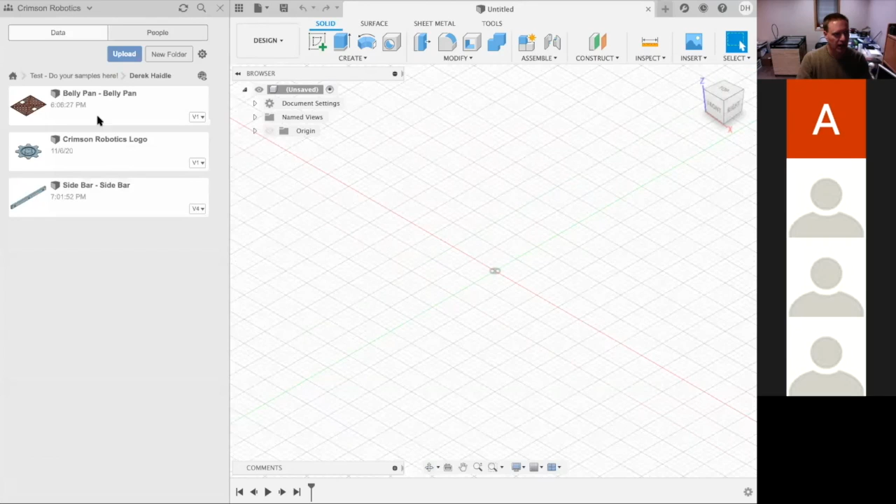And again, in my test folder, I have my belly pan. Let's open her up. This is going to be a lot of the same stuff again. All right. So we've got to go around. We've got to figure out how to do everything here. So we're going to short circuit some of this stuff because it would take a long time to actually do this and set it all up, but we're going to do quite a bit of it.

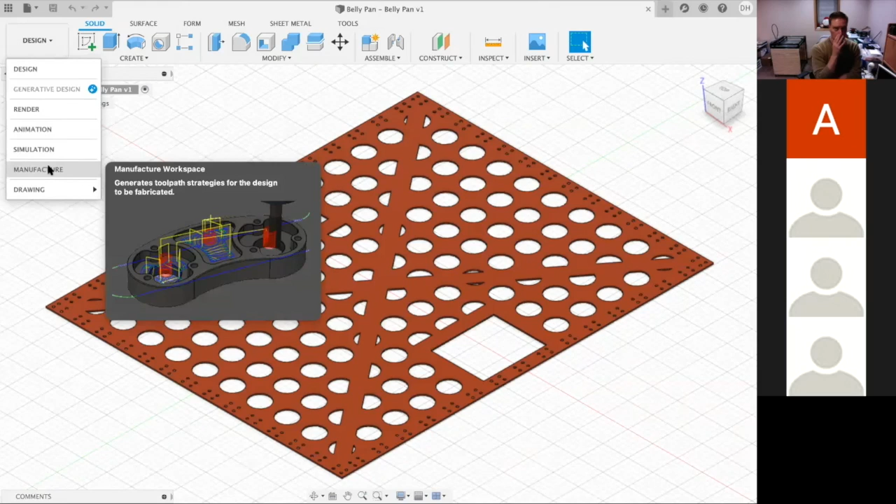So design wise, we're going to go into manufacturing again. Make sure you select manufacturing. We go into our setups, new setup. Now, this time what we're going to be doing is taking a flat piece of sheet metal, right? Like a big piece of sheet metal here, and we're going to be mounting it down on our Velox CNC and going around it. Okay, so just have that image in your mind as we're doing this. We are probably going to also mill out the exact dimensions of this within that piece. So let me show you how we're going to do this.

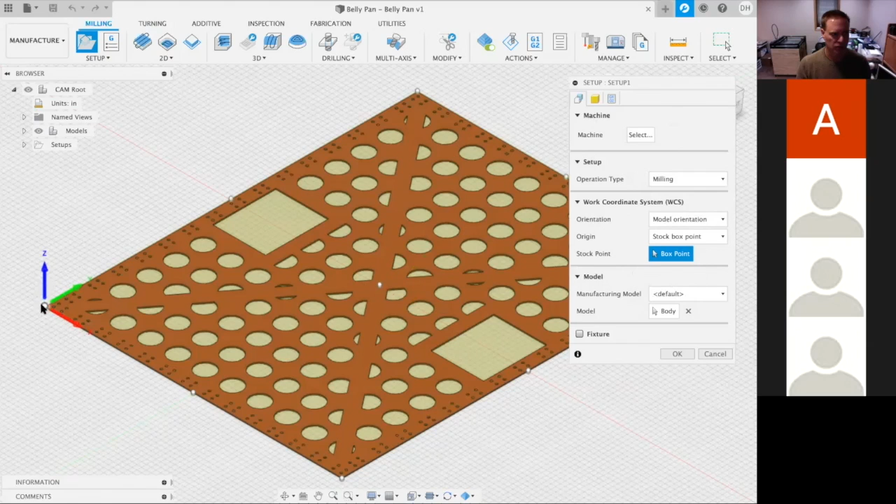Don't worry about machine setup, milling. Orientation, we're going to keep this orientation of X, Y, and Z, but we're going to move our box point to this bottom left-hand corner, okay? So again, we're going to start milling from down in this area, right? The body we already have selected. We're going to go over here to our offsets. This is where I'm going to add, I'm just going to do this kind of indiscriminately at 1 inch, and the top offset I'm going to leave at 0, okay?

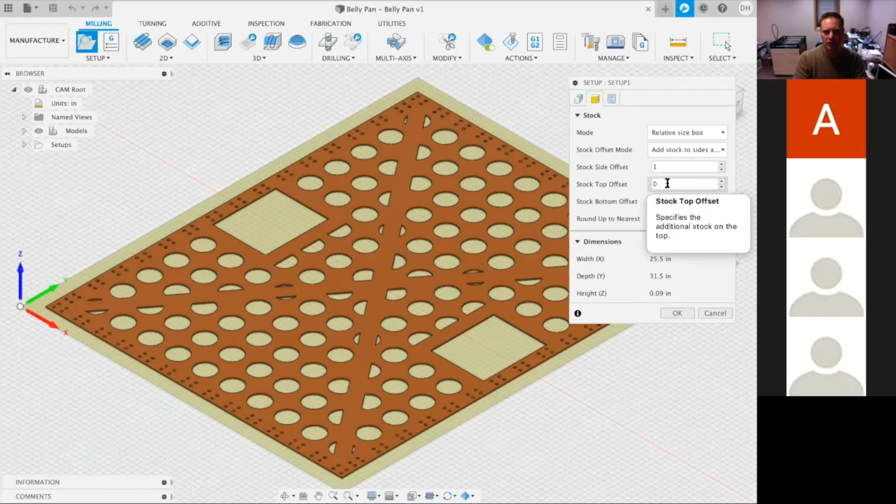So what this means is when we were choosing the thickness of this in Onshape, I believe it is 0.09 inches that we selected. So 0.09 inches thickness for our aluminum, we would want to make sure we had a piece of aluminum that was that thickness, and then we would leave our top offset as 0, right? So when we're doing sheet metal, we want to CAD the same thickness as what we actually have in real life, right? So we would go over and find a piece of sheet metal, figure out that depth, and then notice our Z height here is 0.09. So that's exactly what we have, all right? And we go from there.

All right, so what this means is we have a piece of sheet metal that's actually bigger than our belly pan. So somehow we've got to actually get this milled out of that piece of sheet metal. So we're not going to be perfectly in the center. So when we start our X, Y, and Z, it's going to be at the edge of the sheet metal down here, but our actual belly pan is going to be interior to it. Okay, perfect. All right, so we put our sheet metal down, we find our edges, and now we need to pick one of the operations to do.

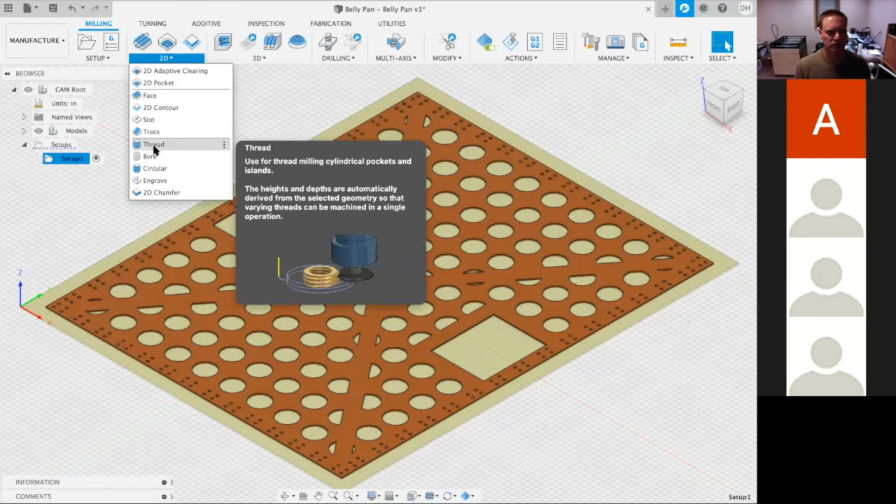You can start with any of the holes. Usually, again, I tend to pick the smallest hole first and put in my smallest bit first and go around and do all those holes, all right? There's other ways of doing it too. For example, maybe you want to do the holes first so that you can go back and put in wood screws into those so that you can hold that piece of sheet metal down better, okay? Which is a good strategy as well. So we're going to do these rivet holes first. And rivet holes we already know how to do, right? Pretty easy. We're going to do our boring operation.

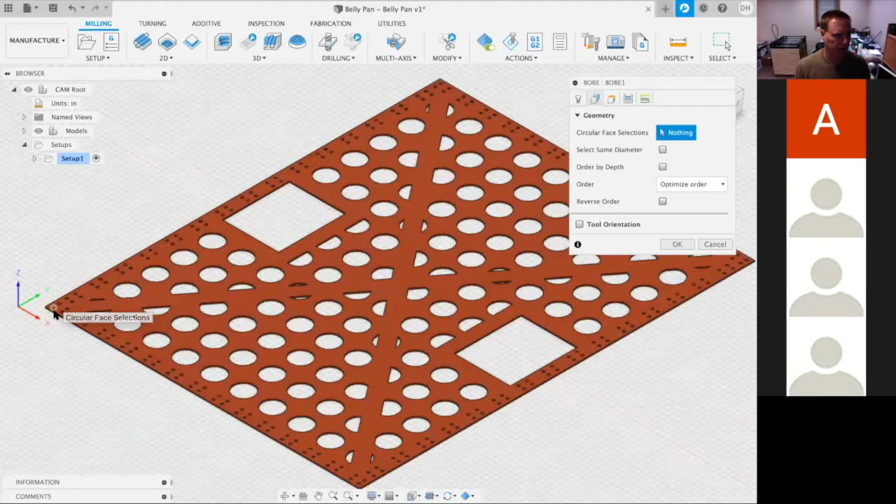We're going to go in and select from our Velox library a 1/8 inch flat end mill. Okay, so Velox library, 1/8 inch flat end mill, select. All of these feeds and speeds come in, woohoo! Then we go to our geometry, and we're going to select one hole here. Doesn't matter which one of these we select. You can select any of them. We're going to do the same diameter. Now, we don't have to worry about Z height here because we don't have a tube. We don't have another plane to work off of. So we can just leave it, and this is fine, okay?

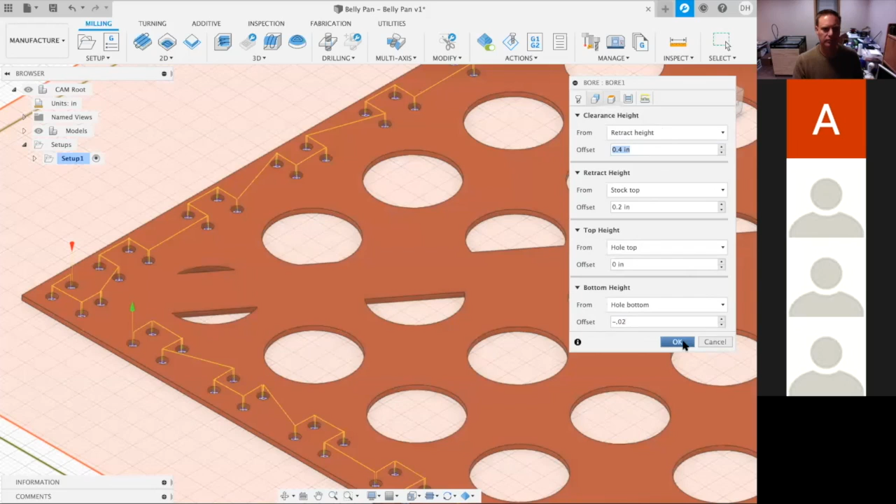Now, our heights, we may want to go a little bit below again. So I'm going to put in negative 0.02. So that's our 20 thousandths of an inch again. We're going to leave all of our passes, and stock to leave, we're just going to leave. We're going to have it take everything out again, okay, and keep going. And then our linking is fine. So we hit OK. I'm going to zoom out.

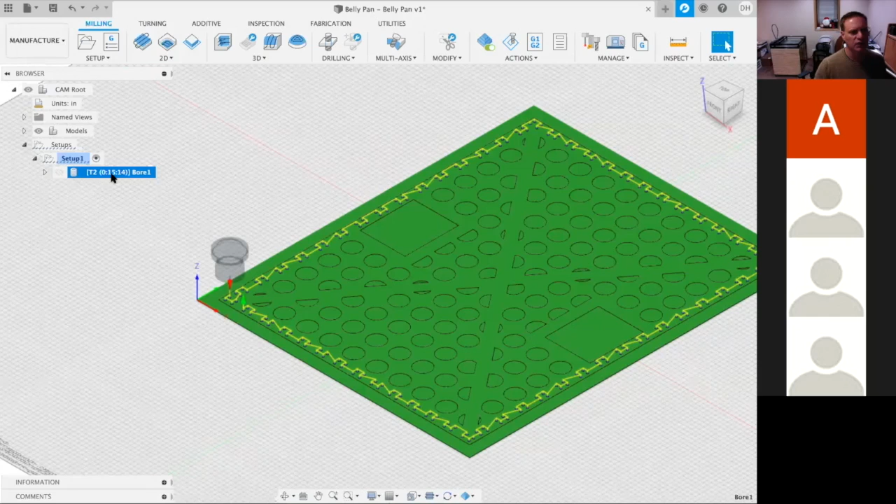Now this is a much longer operation, as you can imagine, because we've got all of these holes to do all the way around it, right? So if you look over here, it says T2, and then it says 15 minutes and 14 seconds. Let me go back over here.

Sidebar. I'm just going to pull up the sidebar at the same time, and you'll notice my tabs up here. So I've got my belly pan and then I've got my sidebar. Along all of our operations here, I forgot to mention, you can see it's 53 seconds for this one. It's 25 seconds. By and large, your longest operation here is going to be changing your tools out, and finding your edges and flipping it over and doing your mounting. The time it takes to actually do these holes is pretty trivial, okay?

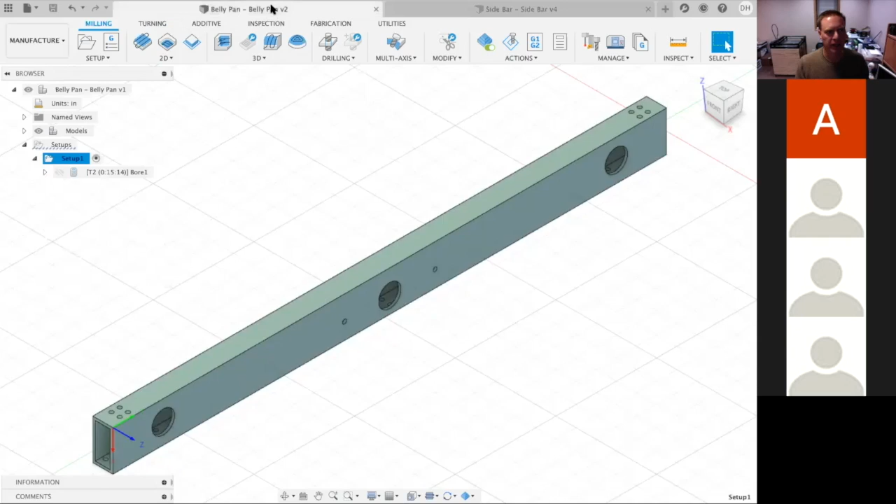But then when we get to the belly pan, it takes some serious time. You're going to put this down. You're going to let it sit and run for 15 minutes to make all of these holes. Now, still a lot faster than if you had to manually drill all these holes, right? But it's a lot longer than what we had for the tubing. Okay, so now we have all of our holes done around the outside. Now, if we needed to use those holes to actually hold our piece of aluminum down at that point, we could do that.

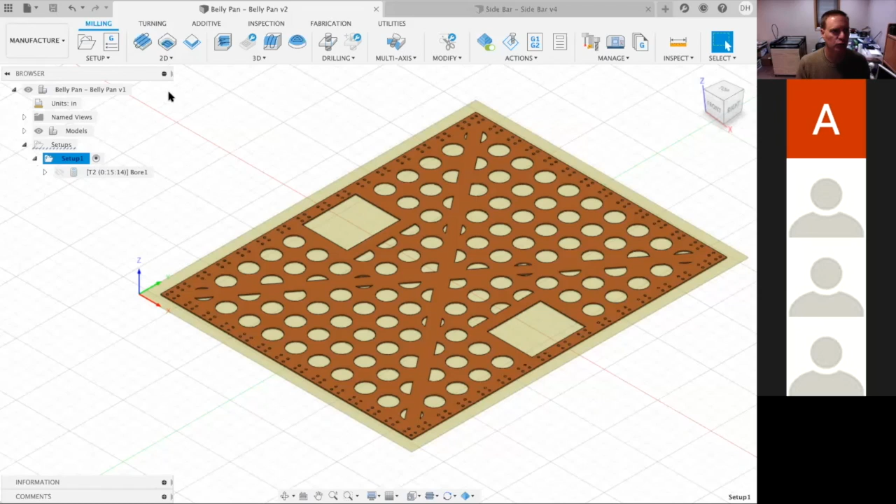I'll get into work holding, by the way, more when we actually are at the shop holding down a piece of aluminum and we get creative in how we do that. All right. So we have our boring operation done. Now we need to go to some of our other operations. So to do these holes, we treat them the same way and these areas the same way that we did our bearing holes. We're going to take those out using a pocket operation. We have our 1/8 inch. We're going to want to take out more and we're going to want to do it faster.

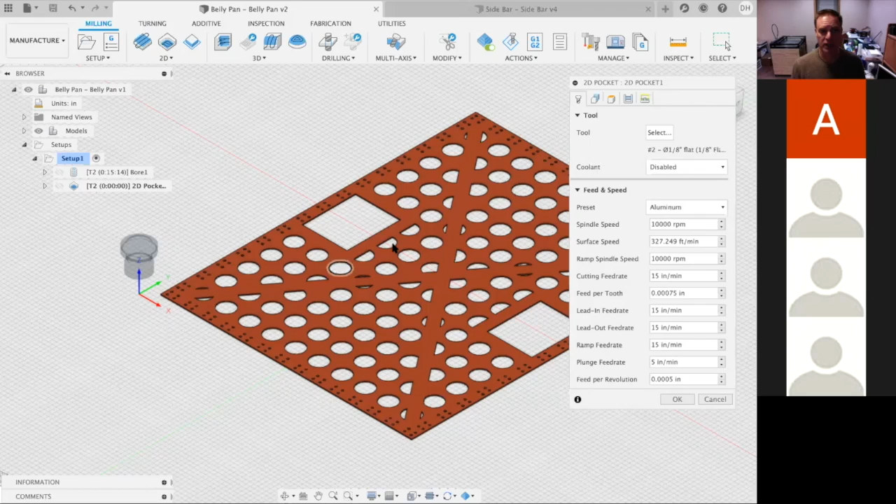Now you may say, that's great, coach, except these smaller holes here, you're not going to be able to do them. You're correct. This is one of the downsides to the way we actually set up our Swiss cheesing of the belly pan. We may actually not do those smaller areas at all. We may get to this point and say, you know what? Even though on our CAD diagram we had these, we're actually not going to take out these small slices at all. We're just going to leave those small slices in our aluminum, and we're only going to take out the larger holes or something that's maybe as much of a half circle or more. We can select them at this point. It's completely discretionary.

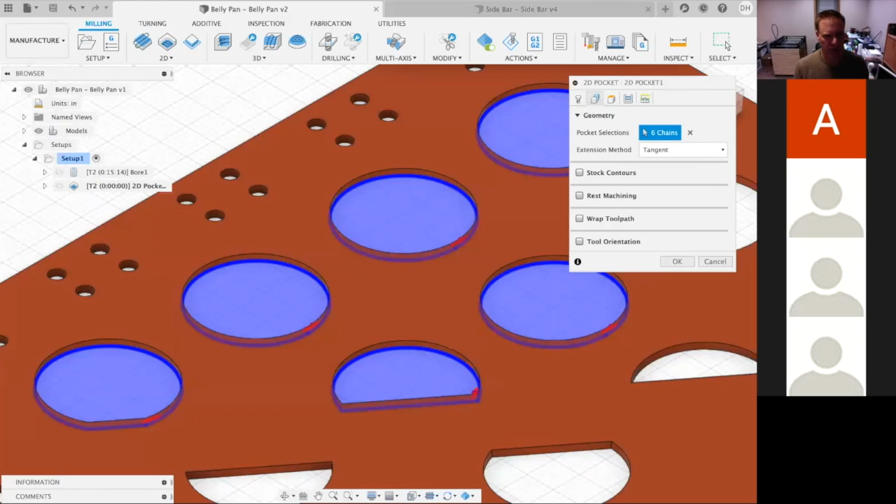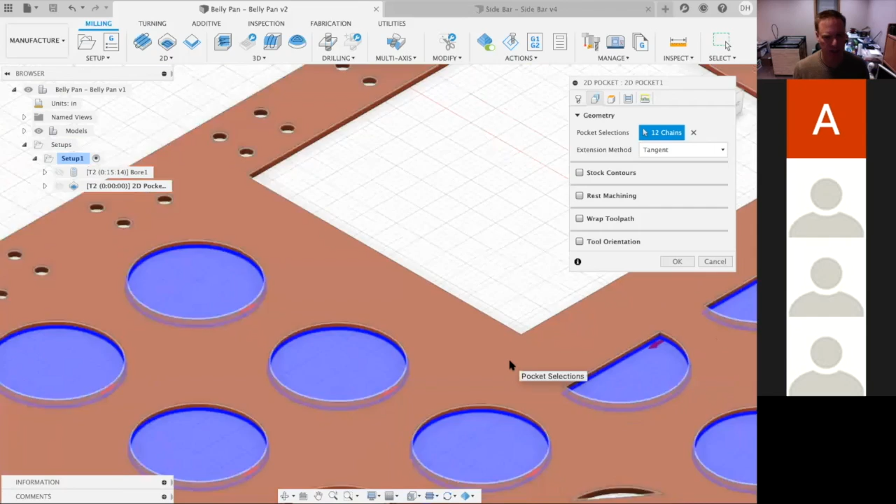Now, here's where it gets long and tedious, right? We have a lot of holes here to do. So we would go through and literally select each one of these. And again, you have to be precise. You have to select the bottom of these, otherwise it does not do these correctly. I may say, oh, that's a big enough hole, and this is a big enough hole, but this one over here is getting pretty small, and so on. And then I just move around. I can also do this square area as well. Now, a larger area like this, I'm actually probably not going to do it that way. We're only going to do our circles or partial circles in a pocketing operation. Some machinists might not even do these that way, but generally speaking, I see them being done this way. So we'll use the pocketing operation for just our holes.

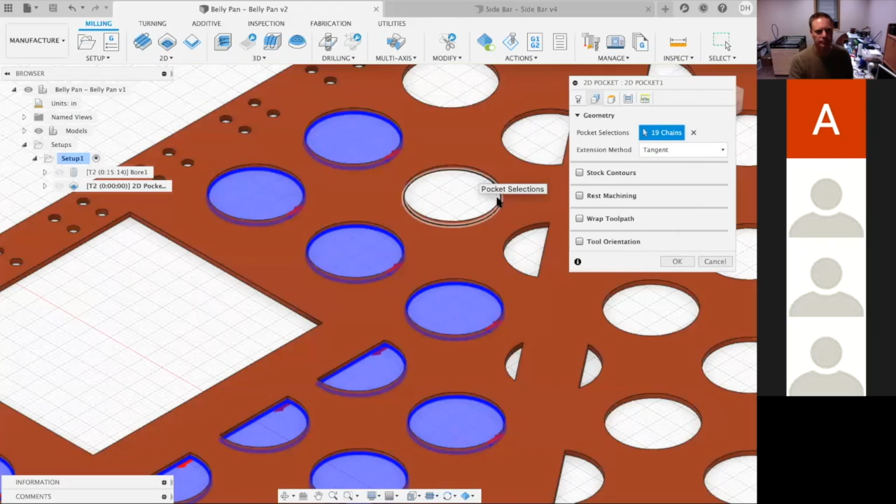Now, as we're going here, at any time we could stop and take a look at it and come back in and add more holes to it. The reason to do that is your machine might really start cranking on these. So let's just say I've got 19 of these selected. Let's do an even 20 here. 20 selected. Let's go through the rest. Our heights, again, we want to be at -0.02. So we're going to take it down just a little bit. But say we're pretty precise here and we don't want to chew up our wasteboard very much. We can take that down to just 0.010 of an inch if we want to.

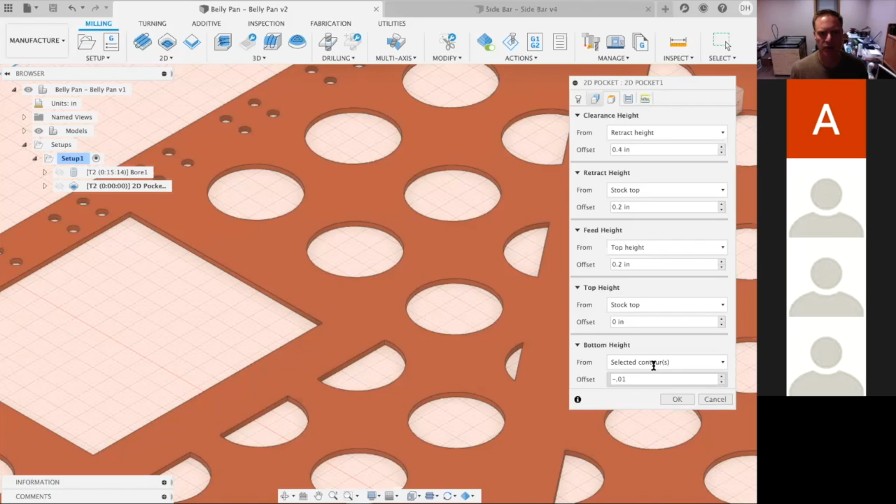Now, if we find after the first cut that it's not going down far enough and not cutting everything out, you can stop it, come back in here, adjust this one parameter, re-export it, and run it again. And you'll find that when you're doing these things, it takes iterations. So it's not uncommon for us to do it multiple times. We're going to leave these the same. It's not important to have these Swiss cheese holes precise, so we're not going to leave any stock on them. And then our linking, we can just leave the way it is.

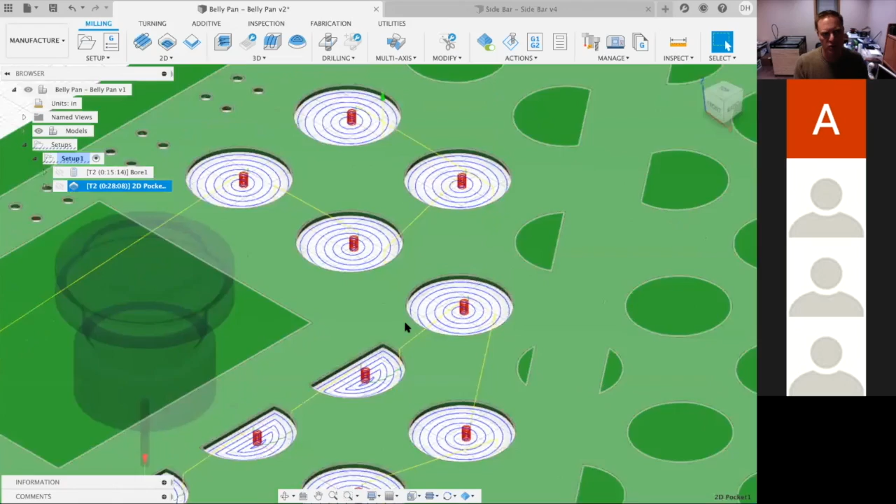I'm going to click OK. Now, it didn't take too long. It just took a couple seconds on my machine. Depending on how old your machine is, it can start taking a while to calculate some of these things. But it takes 28 minutes for the machine to actually mill all of these out. If we had a laser cutting machine that was powerful enough to do aluminum, this would be much faster.

CNC machines are a little bit slower for this type of operation than a laser would be for cutting these, okay? And I believe where we had these done before, they used a laser to do our belly pans. The laser also is fast at doing these smaller ones, and you don't have to switch out tools with a laser, which is kind of nice. You just have a laser.

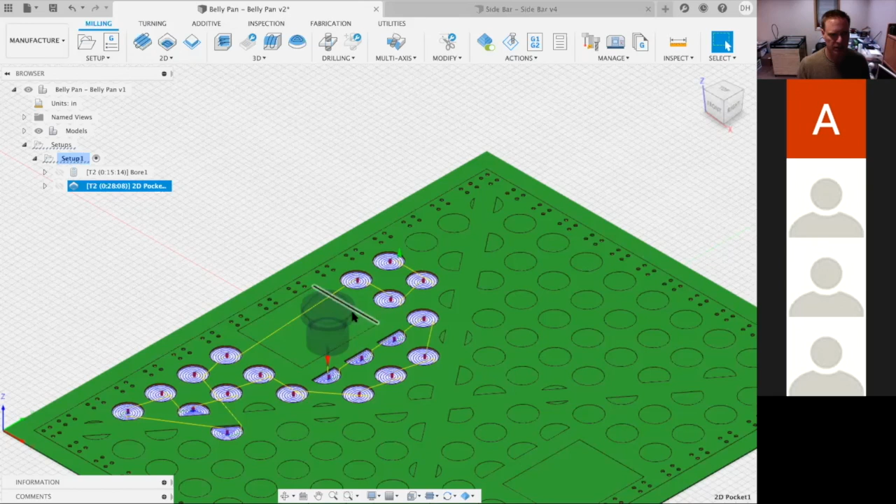So, okay, let's talk about, so you could go around here and select all these holes. I'm not going to continue selecting them, but we would obviously do that if we were doing this on our final belly pan, okay? Now let's say we want to do these pockets here for our gearboxes. Okay, so these are holes for our gearboxes. How do we do these fairly quickly?

What I would probably do is, we know where this is located on our piece of aluminum. I would go over and grab a drill from the shop. I would put in a drill bit, and I would drill 2 holes in the center of this to hold the stock down, okay? Then I would put a wood screw in both those holes to hold down the very center of this piece here. I would do that on both sides, okay? This is going to speed things up so that you don't have to mill it out using a pocket, and it takes a ton of time to do this.

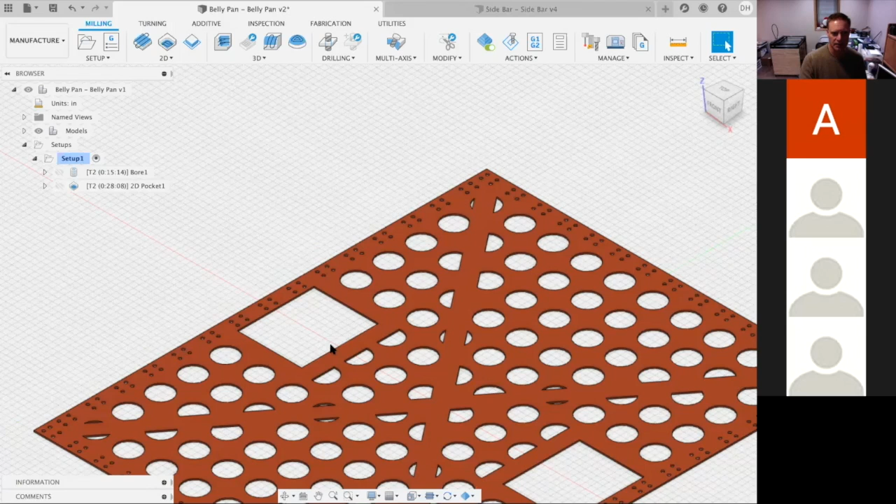So let me demonstrate this for a second. I can do a pocket, and if I were doing this the old way, 1/8 inch end mill, same feeds and speeds, I'm going to select this as a pocket, and it's going to go around and do this. I'll put our depth in, -0.1 of an inch, 0.100 of an inch, and I'm going to not leave any stock. Again, we're horseshoes and hand grenades when we cut out our gearbox holes, so we don't have to be as precise as a bearing hole, so we can do the 0 stock to leave.

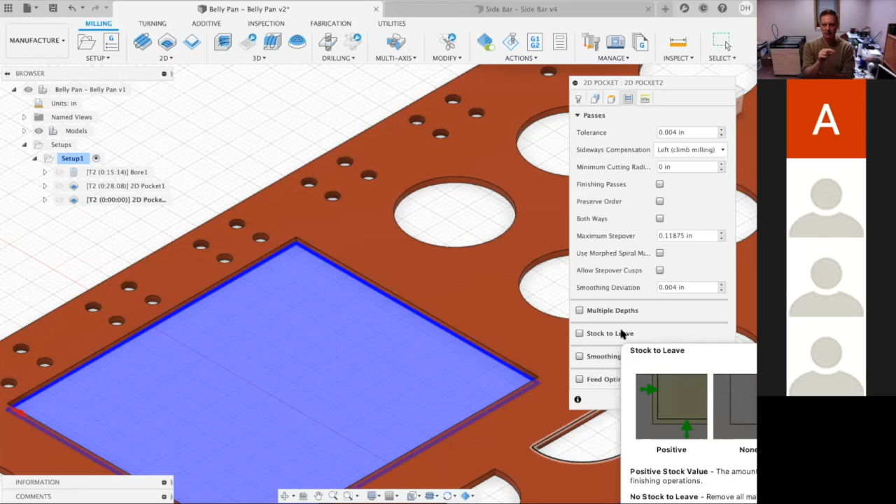By the way, leaving stock also leaves a better finish. So if you want a better finish on it, not just a more precise finish, but a better finish, then you do the stock to leave, okay? Okay, so it does this, and it takes 14 minutes to do this one hole and etch out all that aluminum out of it, okay?

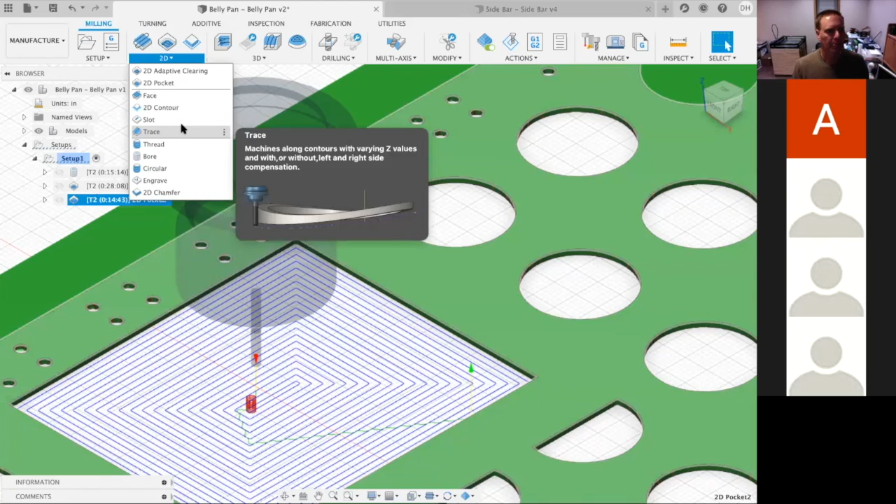Let's do something different. Say I've drilled my 2 holes in this with my regular old shop drill. Instead, I'm going to go around and just do my 2D contour around the outside of it. So I choose my 1/8 inch. I do my same feeds and speeds. I go in here and I select my contour. And then I select my height, -0.1 for 0.100 of an inch. We're going to leave these the same, and again, no stock to leave, okay? And I'm going to click OK.

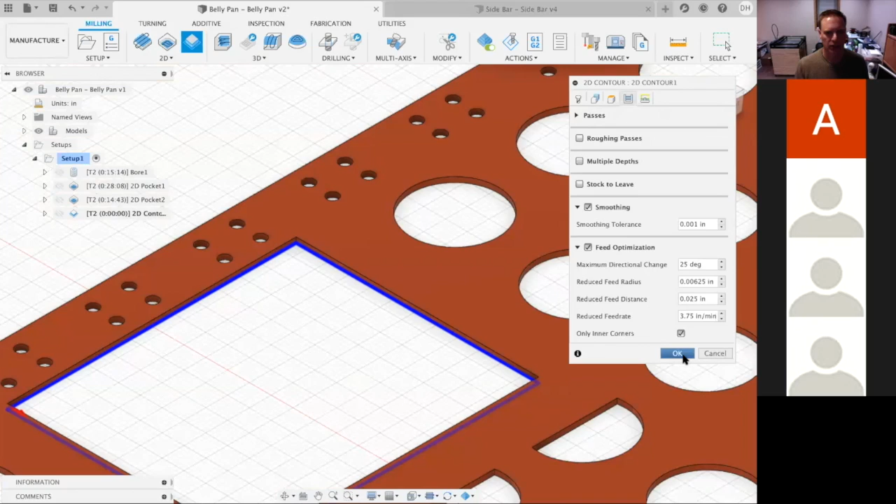Now, all it's going to do is go down, and it's going to go around this once. It takes 1 minute and 31 seconds. So notice, just by drilling 2 holes and putting 2 wood screws in to hold the center, because again, this is the same thing as that puck operation, right? It's going to leave that square in the center, and we don't want that just flying out all over the place and hitting our bit. That's why we're going to drill 2 holes in it, hold it down, and then go around the contour of it and get the rest of the hole taken care of. Okay, any questions about that?

Okay, hopefully when I actually demonstrate this, because I'm going to do a session where I demonstrate doing this, I'll remember to do something like this so that you see how we actually set it up on the CNC. Okay.

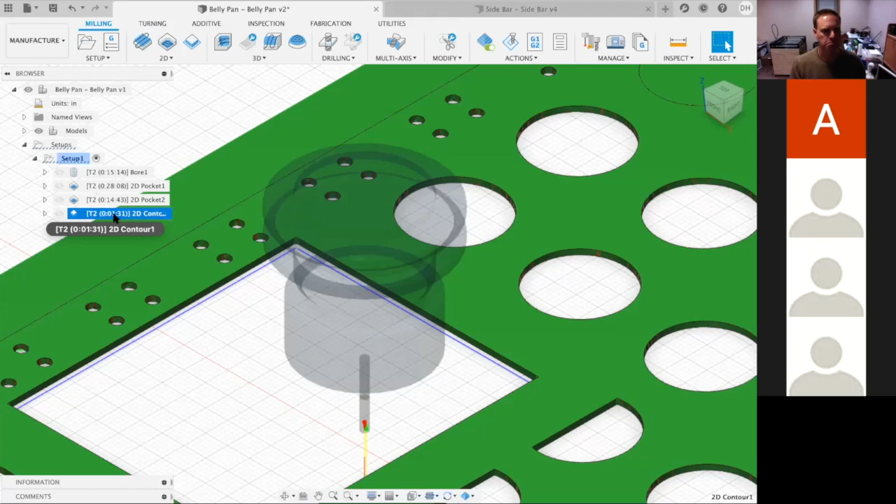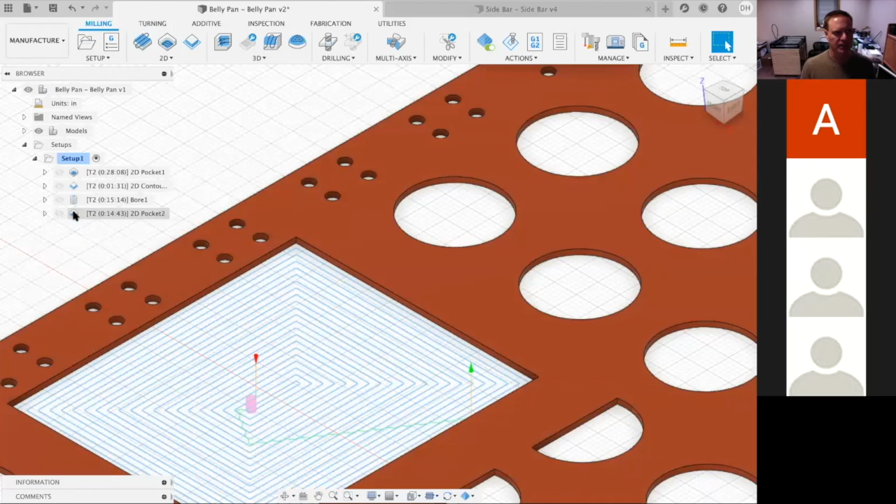All right, so this pocket operation, you can just leave it. By the way, you can move these around on the side. You can decide, you know what, I want these boring operations to happen after my pocketing operation, so I'll just move it down to the bottom, or move it after this. So you can move these operations around. This last pocketing operation, I may never do, so I drag it down to the end and I just leave it. Sometimes I put ZZ in front of it as, hey, I did this, I want to save it, but I'm not really going to use it. That way I have it there for reference in case I need it.

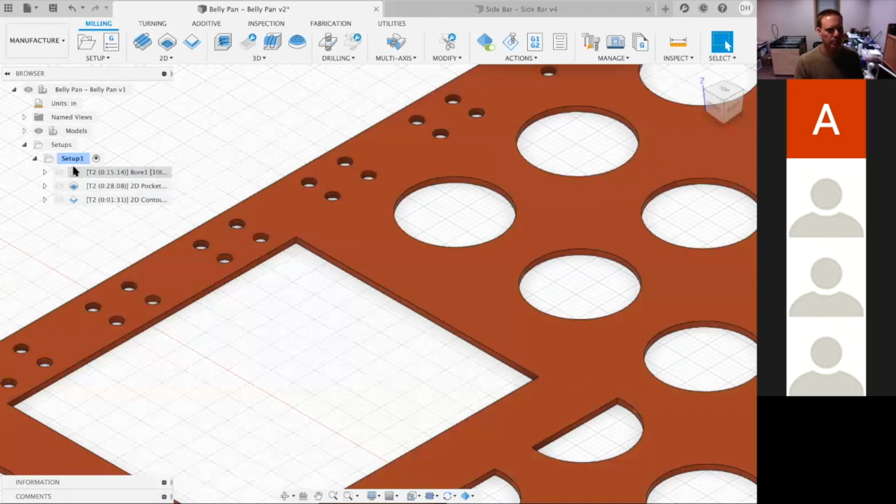There's just different tips and tricks you can use for doing this stuff. Or you can just get rid of it, right? I was just demonstrating it, so you can get rid of that particular operation and it's gone. Then we're back to our normal operations. I'm going to move this one up. We do our boring, then we do our pocketing, and then we do our contours. Oh, I thought I changed this.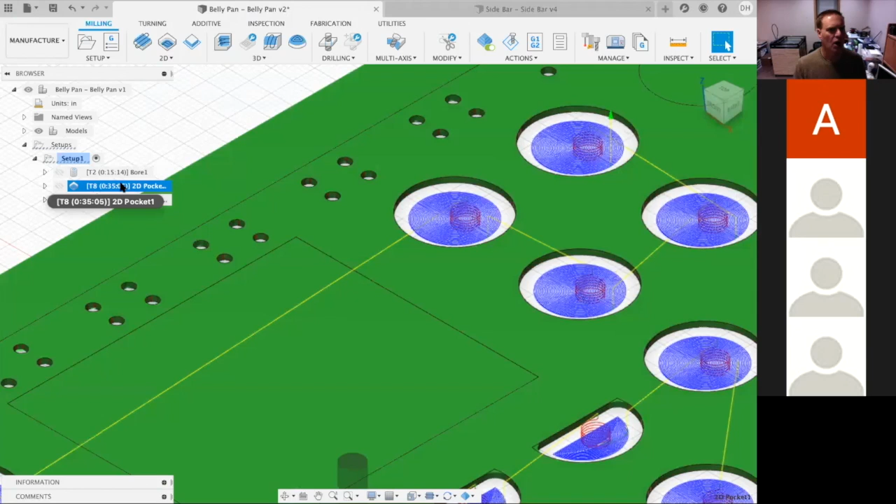Okay, well, we can change it now. Different tool sizes, right? For some reason, this is the 1/8. I want this to be our 3/8. Go from there. That should be okay, and then it changes. Oh, it actually took out less at a time. Notice it's jumped to 35 minutes. It was at less. Give me a second here and I'll show you what happened.

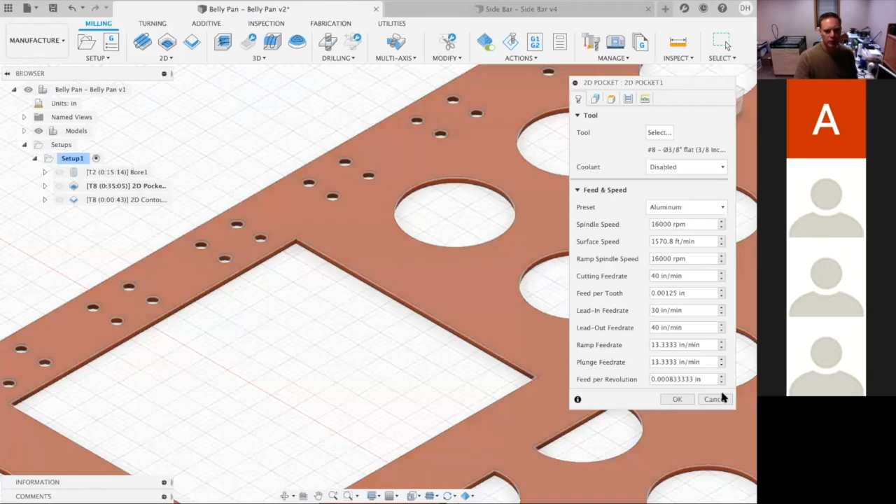3/8 of an inch again. I know what happened. Okay, we must not have this set up quite right on our 1/8 of an inch because this is doing a little bit smaller. Here's what's happening. If you notice, as this spirals in, it's much smaller than we did the 1/8 of an inch. We're doing more passes around and around in this than we were doing with our 1/8 inch. So let's go in here and take a look. This is happening, I want to say, because of our maximum step over.

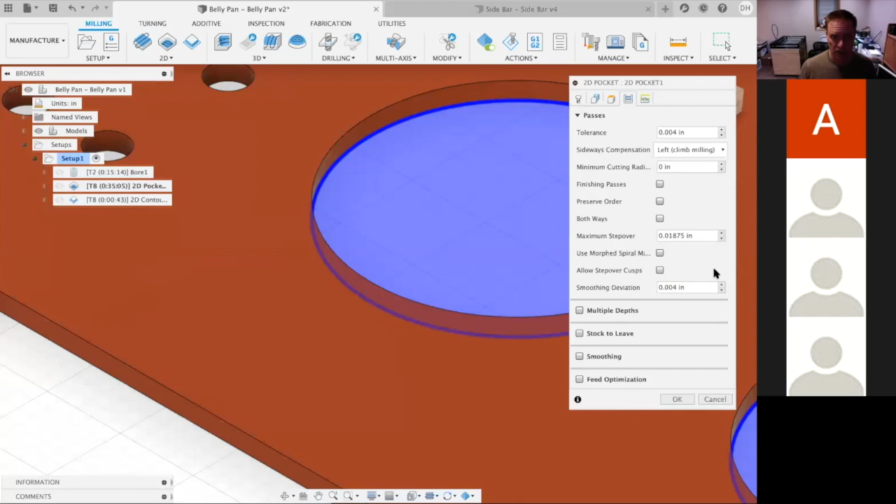Give me 1 second. I'm going to change this to literally 10 times more. I'm going to take that 0 out and hit OK. Look at that. Now it only goes around 4 times and it's done with the hole. Why is this? So my 1/8 of an inch, I don't think is set correctly. I'm going to have to go in and double check what my settings are on this. This is correct because what you want is about 1/10 of the diameter of the bit, which our bit is 3/8 of an inch, right? Let me double check.

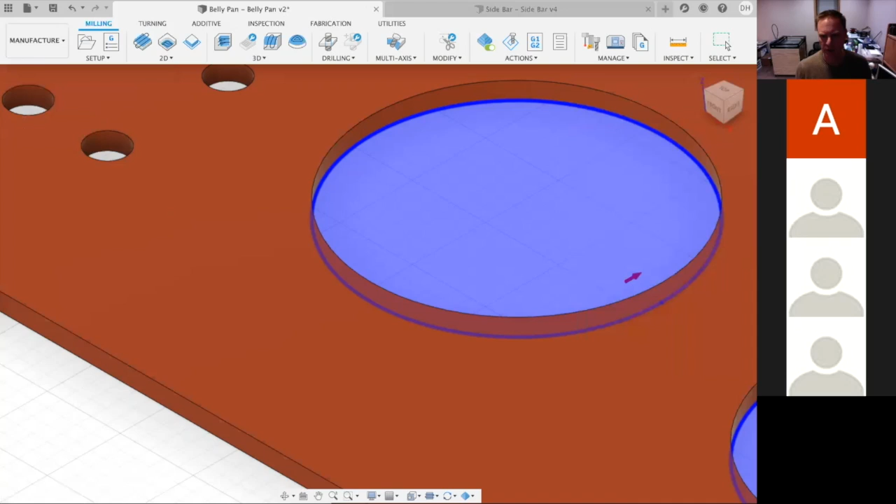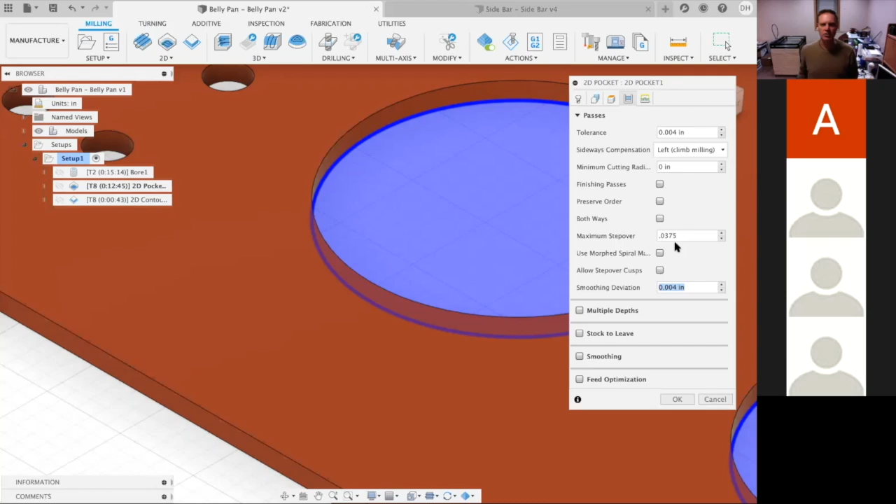Oh, it kept my 1/8 of an inch step over. That's interesting. I didn't have my correct bit selected, so I've got to put this in by hand now. So if you take the size of your bit, which is 3/8 of an inch, it's 0.375, and you divide it by 10. 1/10 of the diameter should be your maximum step over. Typically that will come in for you. Hit OK. Now that is set up correctly, and it takes about 22 minutes. My 1/8 of an inch, if it was going faster than that, I might not have had that step over set correctly. But that's why.

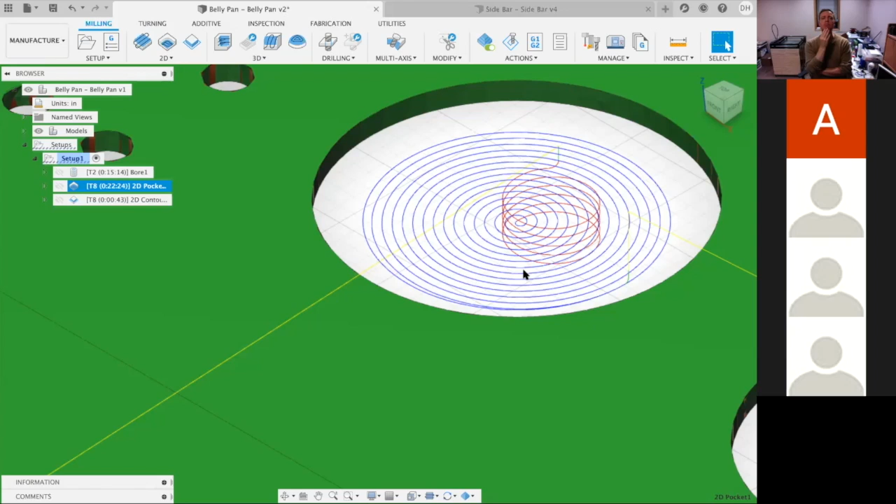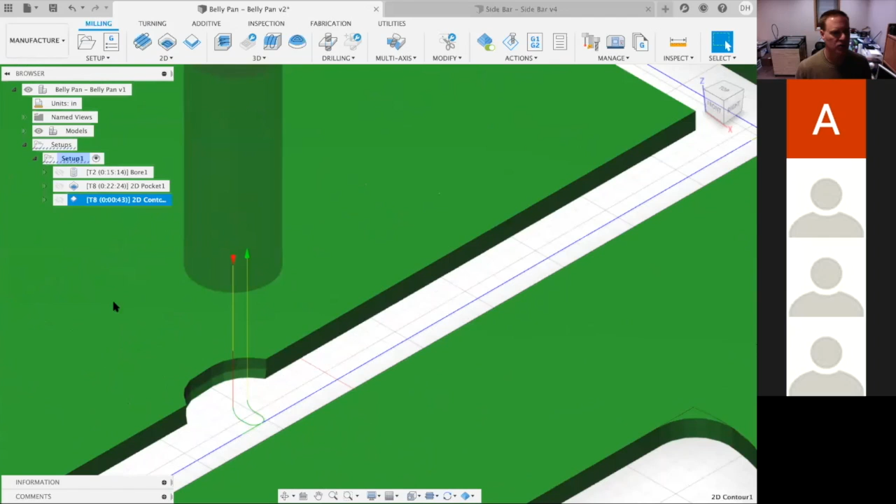And so notice when you change a parameter like that, it dramatically changes the amount of time. It also changes the paths, the number of times it goes around, all that good stuff changes based on just one simple parameter. All right. So we're using our 3/8 inch. We make a tool change from our boring operation to our pocketing and then to our contour. Our contour is the final operation, and it goes around, and notice it just leaves this. Now here's what's interesting about it too, is it kind of digs into it and digs out of it right here. You may or may not want that, and you can set that. You can change some of the settings for that. I'm not as familiar with that, so I'd have to play around with it just a little bit.

Ooh. But it's how it goes in, the lead in and the lead out. You would have to change some of those parameters to change how much it bites in and out of, and let me look at this again right here. This little chunk that it bites in and out of, you can change that by changing some of those lead in and lead out parameters. I'm not gonna do that right now. It's probably fine the way it is. It's not that big a deal, but that's how you would change it.

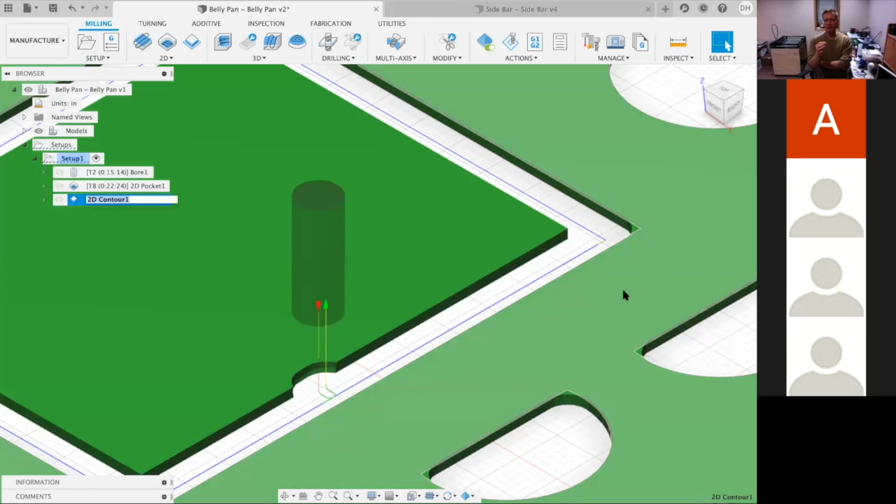Another thing to notice in this, it gets done with it and it didn't go perfectly into the corner there. Notice also over here, it did not go perfectly into the corner. That's okay. That's because of the diameter of our bit. It can't go further into a corner because it's a round bit. It's going to leave a rounded corner here. Now, there are some tips and tricks for doing it. If we have something that has to be set all the way into the corner and we are dependent on it being perfectly into the corner, I'll demonstrate that in a different video. We actually have to do something different in our CAD drawing to do that.

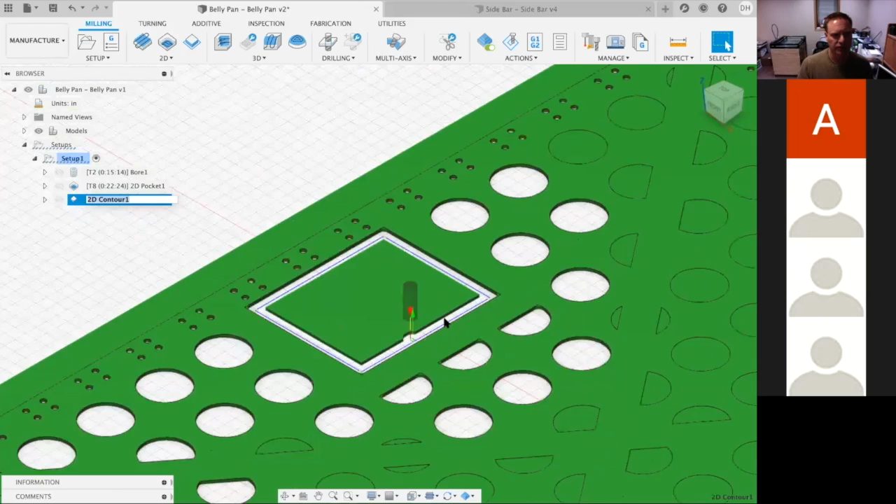So that's basically it. Everything else that I've demonstrated here, you would just apply to the remaining areas. And again, I wouldn't take out these smaller areas. I would go ahead and leave them and just take out the big ones and go from there.